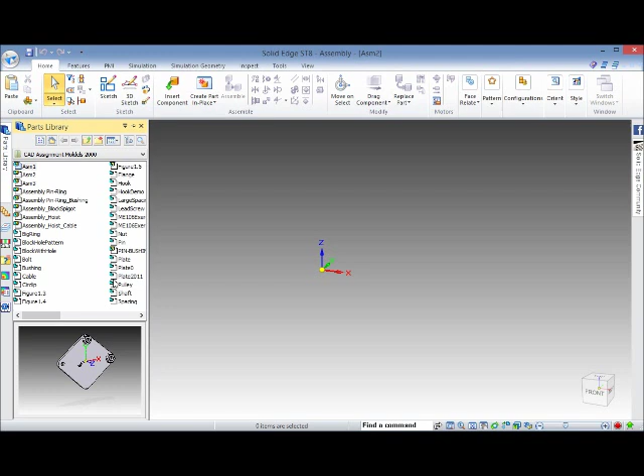In this video, we are going to explain how to use the assembly module to make an assembly. As suggested by the instructions, we start with the shaft first. So double click and move that into the working space.

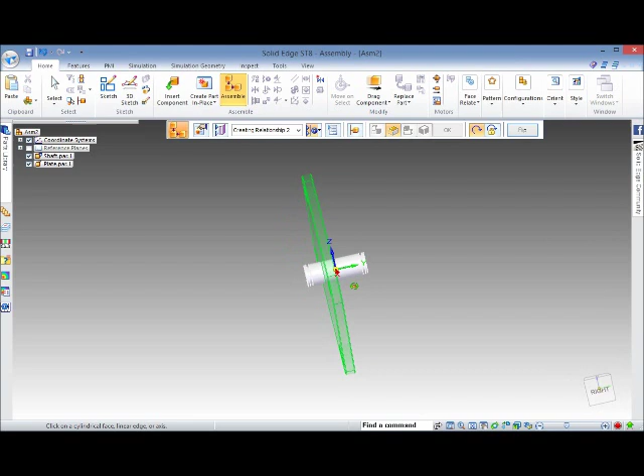The next is to move the plate in there. So double click it. Now I need to specify the axle alignment first. You can see here the plate is aligned with the shaft, but the position is not right. So I need to use the mate command to mate this surface here with this surface.

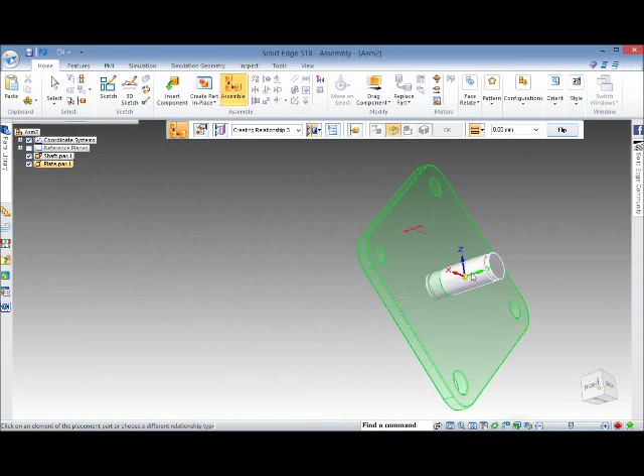You can see now the plate has been moved to the edge of the groove. So these two are flush with each other. Right? You can see this position. The next is to add more parts.

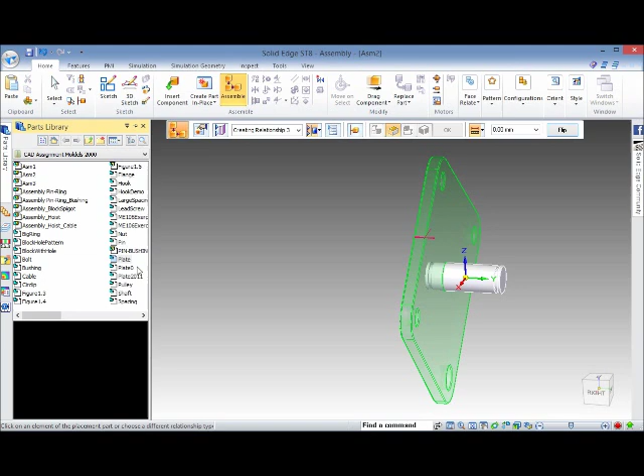This time I'd like to add a washer between the plate and the pulley. So find the washer, double click, the washer's in. Right. Then I use the mate command this time.

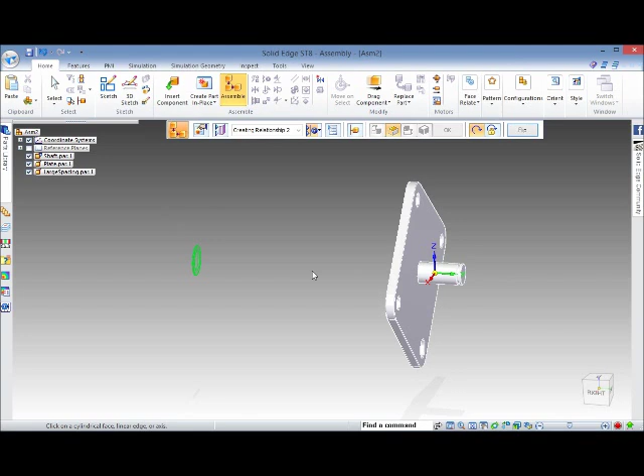Axle alignment first, align them, and then use the mate command to mate the surface of the washer to the surface of the plate. You can see it's in position. At this moment, if you want to move the washer a little bit so that we can have the pulley right in the middle of the shaft, we can adjust the distance.

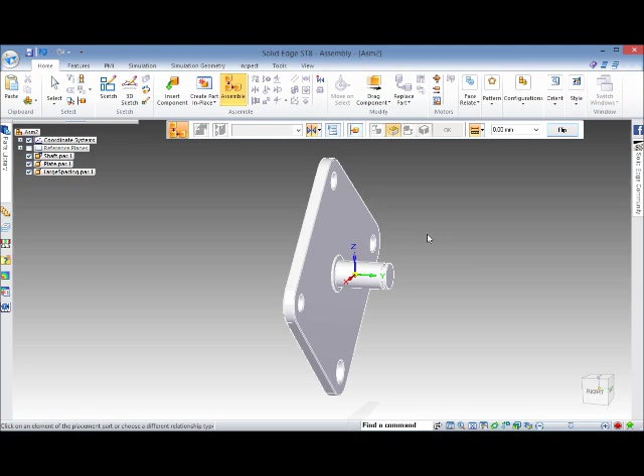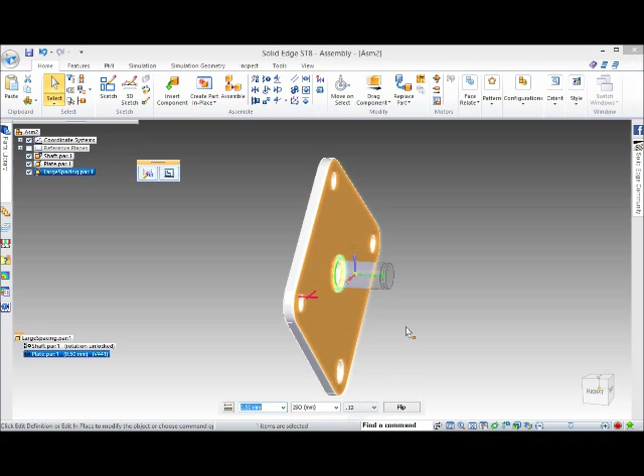To do that, we need to right click on this washer, then we have this shape, click on this mate. Then at the bottom here, you can see the space. The exact space depends on the part you are given. Some washers you receive are 1 millimeter, some are slightly thicker than that, 1.2. So how much gap is left there depends on the dimension of the washer.

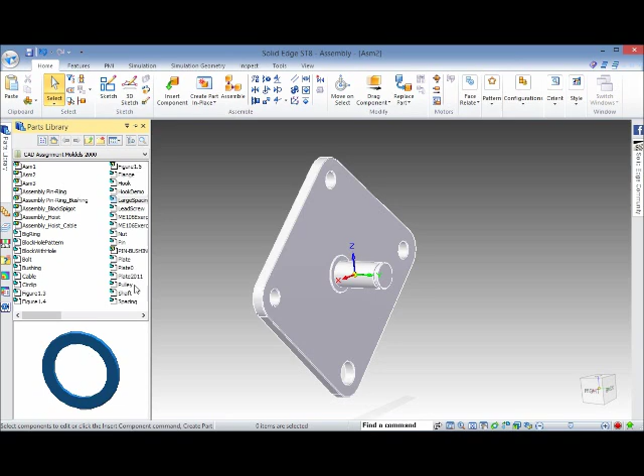I just put the figure point something in there as a demonstration, but you need to actually work out exactly the dimension you need to put in there. Next is to put the pulley in. Okay, I just put the pulley in, double click.

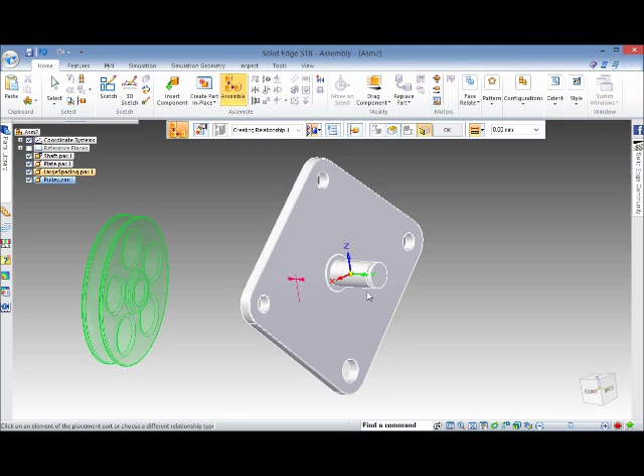Now the first thing I'm going to do, instead of an axial alignment, I use the plane alignment. You can see these two planes are aligned this way, the end of the pulley with the spacer. But that is not exactly what we want.

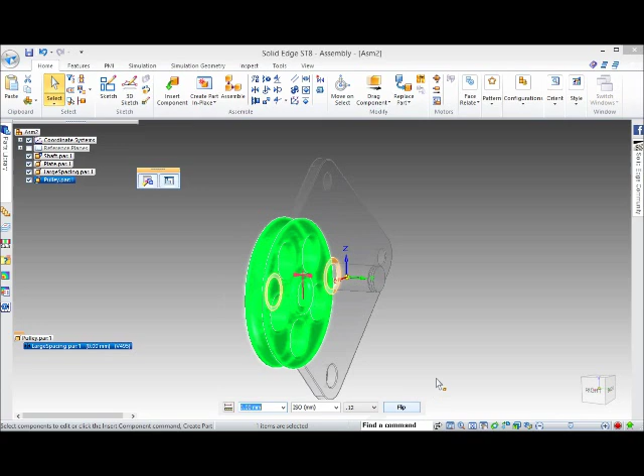So we can edit it by clicking select, clicking on this pulley, and right clicking on this, and you can access the flip at the very end of the bar at the bottom of the screen. Then the pulley is in the right position.

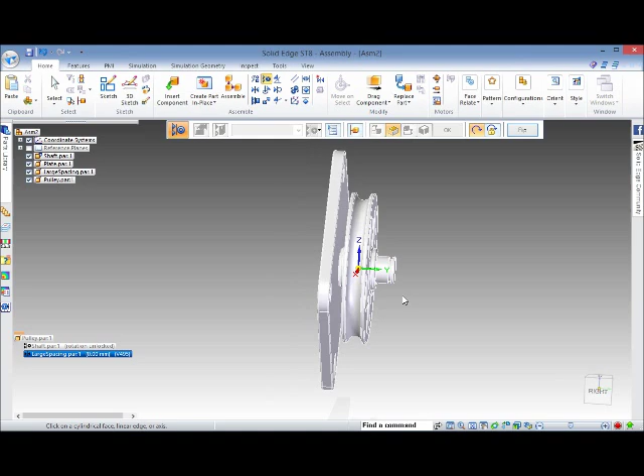Next is to use axial alignment and click both axes. Then you can see this pulley is set in the assembly and aligned with the shaft. That's it for this demonstration.